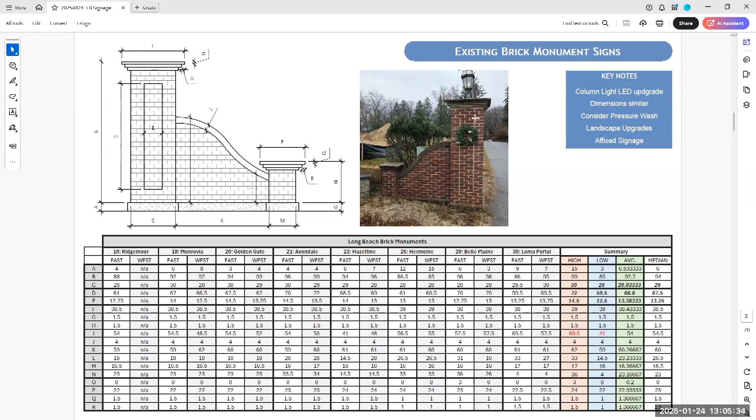The existing signs are in decent condition. They are historic too. So we're considering some landscape upgrades around the signs, maybe some signage affixed to say welcome to Long Beach. And then there are some existing lights on a lot of these columns too - maybe thinking going forward about switching out to some LED and a similar type of historic light fixture.

For an initial look, I looked at taking the columns that were the brick monuments - can we create these new places along Lakeshore Drive? As you enter into town, there are a couple different options. We kind of mimic the brick monuments. We're limited on the amount of space we have within the right of way here. We don't want to make anything too big, that's going to start hindering traffic and people getting by through here too.

So kind of looking at monuments, and maybe there's an idea of a sign affixed to the side of these as one early option. Potentially the sign could be built right onto the monuments, and this could be applied to the existing brick monuments too.

Since we have a little more room, these could become a little more grand for the main entrances into town along Lakeshore Drive, with some branding of the road name as well. Again, are we integrating lights from the existing monuments, a good way to highlight these opportunities. So for Lakeshore Drive we had a few different options, and these could be applied to either the west or east end of the project.

We also look at Chastleton coming into town in the south. This is a location where, based on the county's information, we have a much tighter right-of-way, only 40 feet here. You can see in this top left image the right-of-way might be shifted a little to the right, but the county's information isn't 100% accurate. This is the idea where we pick up the same column motif with some affixed signage, so there's consistency on both Lakeshore Drive and Chastleton as you're coming into the community.

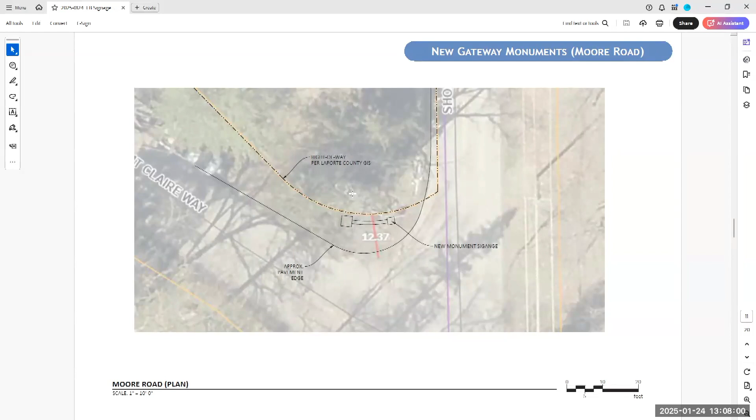The last location I looked at was Moore Road as you're coming in off Montclair. There's a bit of a sliver here where we have opportunity to maybe recreate the actual brick monument sign similar to the ones off Lakeshore Drive, or something similar. Or we could look at taking that same sign panel developed for the columns, but making it a little more grand as you pull in off Moore Road. So the idea is maybe one tall column with a light that steps down, similar to the Lakeshore Drive monuments.

Or we could do something a little more traditional, with two similar size columns on either side and a 'Welcome to Long Beach' sign in the middle. There are a lot of options for the actual signage, the wording, and the coloring, but we wanted to use this preliminary opportunity to see if we're in the right ballpark and gather some preliminary feedback on the overall design ideas.

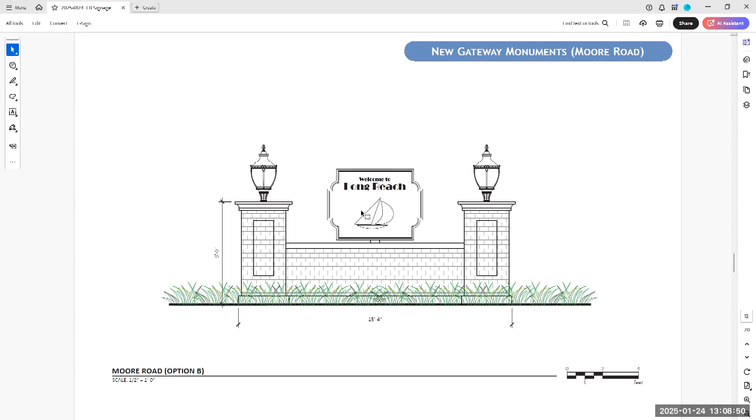The signs themselves can be made many different ways: HDPE, half metal, or printed vinyl too. There are standard shape options and custom shape options. We'll get into all those details as we further refine, and figure out what colors we want to go with.

With the town established in the 1920s, we started looking at some Art Deco appropriate fonts. These are just a handful I threw out as a starting point for initial feedback—the blockier types of lettering like Impetus or Broadway, or some more contemporary styles still paying homage to the past, like Mendel and Casablanca.

There are a lot of standard light fixtures out there that are LED compliant that we can match to upgrade the existing columns going forward. This is just a handful of them; there's more we can get into for picking out exacts and maybe considering replacements.

You didn't see this too much, but we also measured all the beach stop signs. They're fairly consistent with the exception of Stop 24, which is the anomaly of all of them. These are starting to show their age—the paint's chipping and they're starting to rust as well.

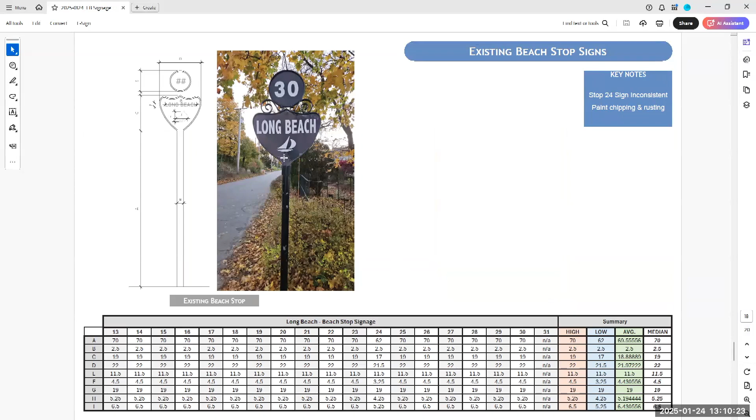So going forward, considering replacements of those, you'd utilize the same types used on the signage materials, standardizing the posts and any arm brackets, and the same with the street signs. They all get tied together in a family of signage—the beach stop signs, the street signs, everything can have a unique Long Beach touch to it.

So that was just kind of a quick overview of where we're at with the initial design process. I'll scroll back to some of these early concepts here and open it up to some dialogue and feedback from everybody. This is just our first ideas, but we really want to hear what everybody else is thinking, and work to help build a consensus here.

John, I just want to jump in here and thank you for the work that you've done here, taking this and expanding it into an overall branding of all the signs, and looking at this in the big picture, not just 5 entrance signs, but everything in totality. So I do appreciate that.

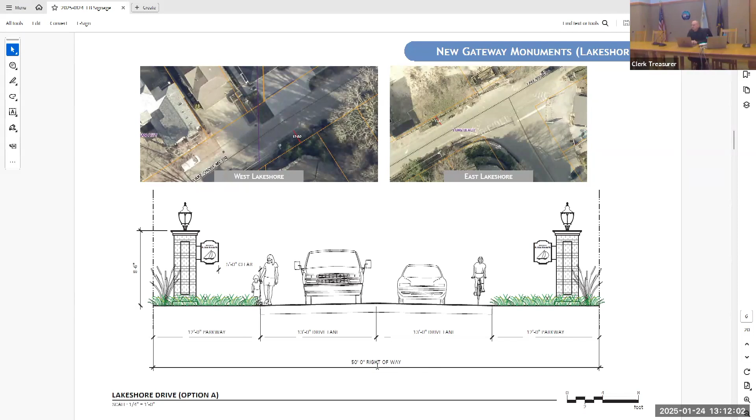I just want to confirm before we open it up to everyone's comments: is the underlying assumption here that we're working within existing right-of-ways, and therefore that's driving some footprints, especially on Chastleton, where we perhaps would like to see the flares on the side? But this is the room that we have and the setbacks, etc. So we're working with what we have. Is that correct?

That's my correct assumption. I'm trying to work within the existing right-of-ways of the town. Now, I will say on Chastleton, from my understanding, the town does own the parcels to the west here, so there may be some opportunities to bump this out, to redo the right potentially. But at this point in time, we're trying to fit into what's existing.

Great, thank you for that clarification. Open to comments. I know that we have at least 3 members of council on Zoom, but open to comments from everyone about the work that John has done.

I have a question, John. John James Brown, good to see you. Hi, Jan, how are you? Great. On the east side of Chastleton, is the property Michigan City or Long Beach? Do you know?

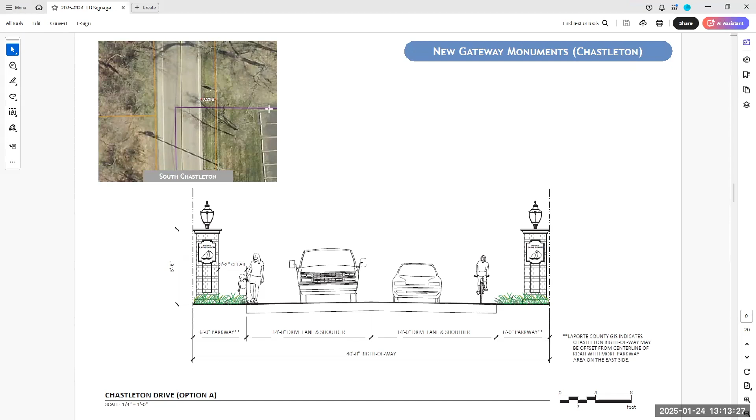On the east side, it's Long Beach. If you see this purple line right here, this is the Hacienda parking lot. Basically, the last stall in there is the line where the town's line to the north or south is here, so we're working in that zone. To the west, the town owns a little farther south too, on both sides.

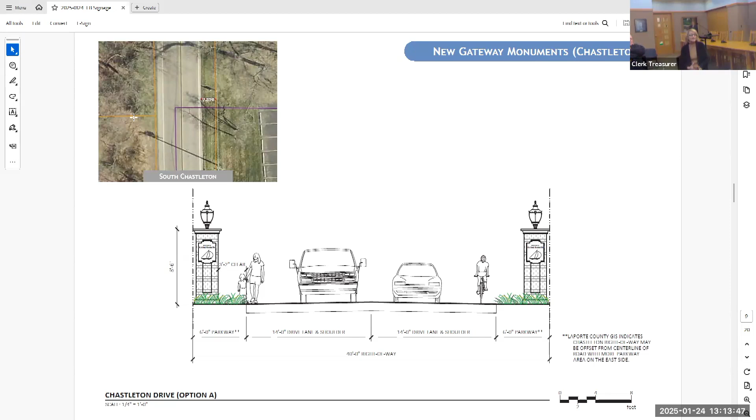Perfect, thank you. And then lighting—have you considered using dark sky lighting parameters for the lights? Yeah, I think that's a really great point, Jan. Where's my pictures of the different light fixtures? So a lot of these have the caps on top too that help prevent light from going straight up to the sky.

The current light that's out there has a bit of a glass top that does allow, I think, some light to filter through. So it's going to be a discussion of how to balance matching historic versus proceeding with a dark sky effort. I like to promote dark sky, especially on the lakefront there, to not contribute too much to light pollution, but I do recognize there's a historic aspect to the light that's on those columns currently.

Yeah, great, and that's a great point too, Janice. Over time on the existing lights that we do have, we would want to transition those over to something dark sky friendly, maybe when they need to be replaced. Perfect, yes, correct, just over time.

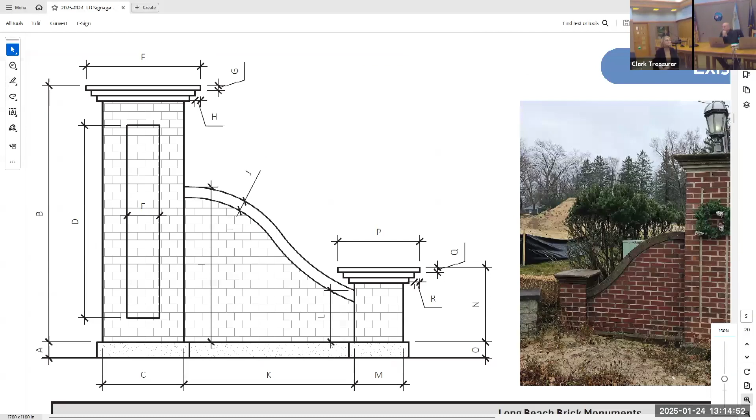That would be my next question, because doing it all at once—well, some of them are originals, I think, I'm not quite sure of that—but maybe there's another use for them so we can reuse instead of recycle. Whether 100 years old, we'll just go through it one at a time. Yeah, exactly. Other comments?

This is Kendra, I love it. I would just say at first glance, I love option 1 for Lakeshore Drive, as opposed to this one here. Yeah, I like the look of that, but I'm just wondering if we have enough room with that hanging, or if...

...with the sign kind of protruding out to the side, if there's enough room or somebody on a bike is going to run into it or whatever. But I love the look of that, just visually. And then I love the look of option B for Moore Road.

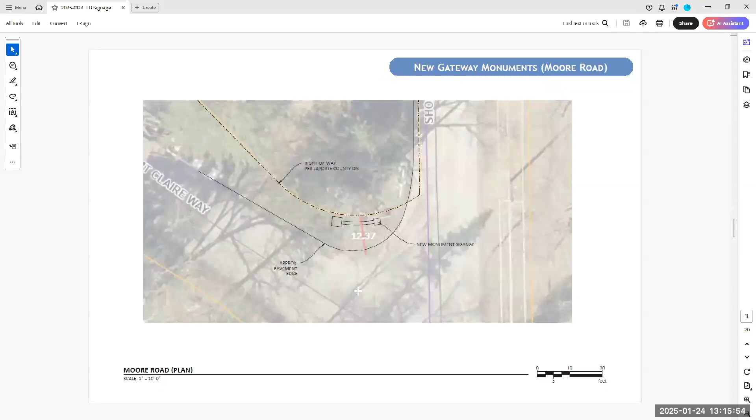Those are just my opinions. And then, which is this one? Yep, I like that one. And then I love the heritage version of the light on top, and I really appreciate it. I wasn't expecting your presentation to be consistent with making things cohesive within the town, which I really appreciate. I love all this, I hope we can incorporate all this. I like the look of that heritage lamp.

The only thing I maybe don't like, or don't think I will personally like, is putting signage on any existing pillars that are already there, like at 21 or wherever the pillars are that lead inward to the streets. I'd like to see the Long Beach or Welcome or whatever you decide at the entrances, but leave the pillars alone where they stand. Maybe just make them all consistent with the new light fixtures and new street signs. I wish we could get back the old street signs they took away in the early 90s. Those were the best, but this looks really great. Thank you for everything, I like it.

Well, thanks, I appreciate that. And I think that's a good point about the signs coming into the brick monuments too. I agree with you to some extent here, these were the historic ones, let's keep them as is and keep the signage to the entrances as well. It was just another opportunity to start tying everything together. I thought it was part of my job too, to take a step back and cohesively look at everything as we're getting into these discussions. I think it helps facilitate decisions we'll make down the road once we're looking at everything cohesively. Absolutely.

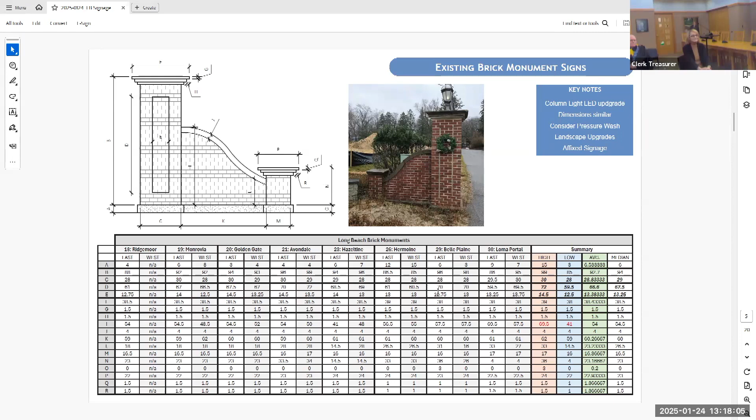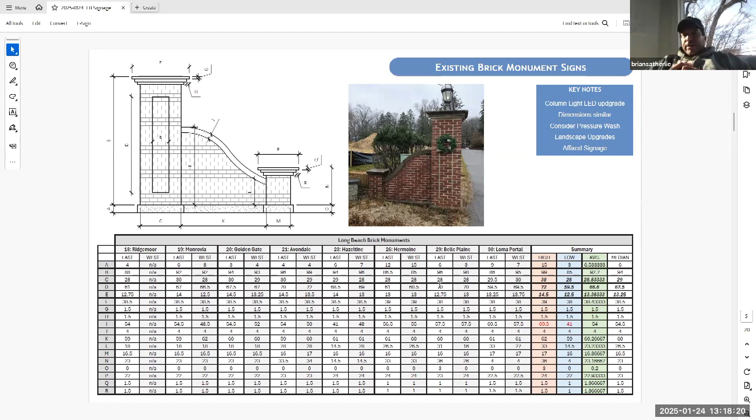Brian: I have a question about the stops, the individual beach stops, the signs you said are deteriorating. Is the goal to fix those or eliminate them? I think that's a question for the group here. To fix them, these are sheet metal pieces probably custom done 50 years ago. They could be taken off and restored, or do we want to try to match this with more modern type of materials? There's a couple different options we can go there, obviously.

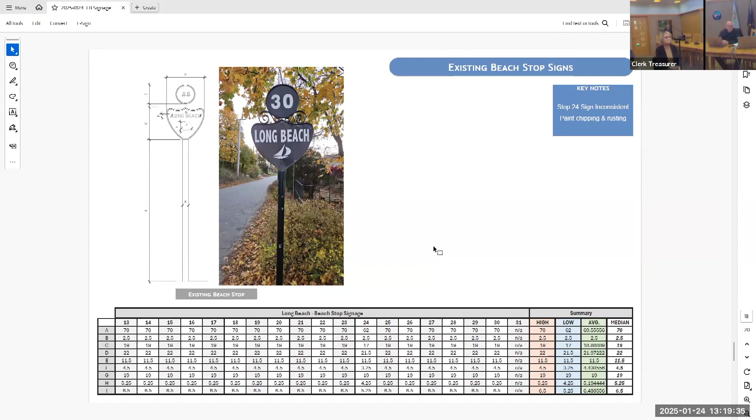But Brian, just my opinion, I think the objective would be to keep the stop signs but integrate them into a cohesive look with the other signs we talk about building, or add to the existing pillars to make sure we're using the same sailboat. That sailboat is sometimes different, but yet a cohesive brand across, but keeping those signs and stops I think would be my vote. But Ken just gave the thumbs up. Your thoughts on that, Brian? Are you in agreement with that?

I am. My other question would be, I don't know how to phrase this, but the stop signs, individual stop signs and speed limit signs, is there a goal to do something with those as well, or just have the standard stop signs and street signs? Are we going to try to have some cohesiveness through all of the signage, or are we going to leave some of the mandatory traffic signage alone?

The way I viewed it, Brian, was I think this is an opportunity here, an opportunity to tie things together. It's not a necessity, it's not a requirement. And I understand there's going to be financial impacts to changing all of your stop signs to a more aesthetic type of pole and everything. If this is something the town is considering, I can help you try to quantify these, try to understand replacement strategy or timing or what that cost might be down the road too. That would be my vote, to see if we can do everything to keep that cohesiveness.

And I think that will add to the branding of everything of the town. And Brian, just to be clear, in the current scope of work that the council has funded, this is outside of that, but John was nice enough to present the concept, that if we want to keep going in this direction with the signage for the stops, now is the time to contemplate all of these things, and as stuff needs to get replaced, perhaps do it this way, but that is outside of the scope of work that council did fund at this time. Okay, thank you.

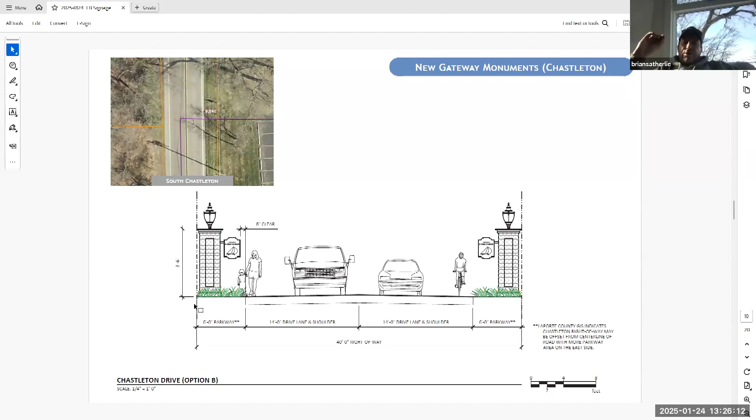What do those signs say? Do they say 'Welcome to Long Beach'? Right now I just had these say 'Welcome to Long Beach.' There's room to say if there's a town brand, a beach community, or any other information here, but I just kept them simple at the initial stage.

And what would the back say? You're leaving Long Beach, goodbye. I could, yeah, some communities do say goodbye, thanks for coming. Some just leave them blank too.

I would add, I agree with Kendra regarding the uniformity aspect of things. If you're going to go with the singular pillar, I kind of like the use of that pillar at all the entrance stops, with maybe the one that Janice was talking about. I'm not familiar with it. Oh, that pillar would be fine. So I think uniformity would be what I'd be concerned about.

And I really like the look of the pillar with the signage being off of the pillar. When you put the sign on the pillar, it takes away from the pillar, in my opinion.

You don't see the full detail of the pillar, but if that's the only option because of the limitations, then I guess so be it.

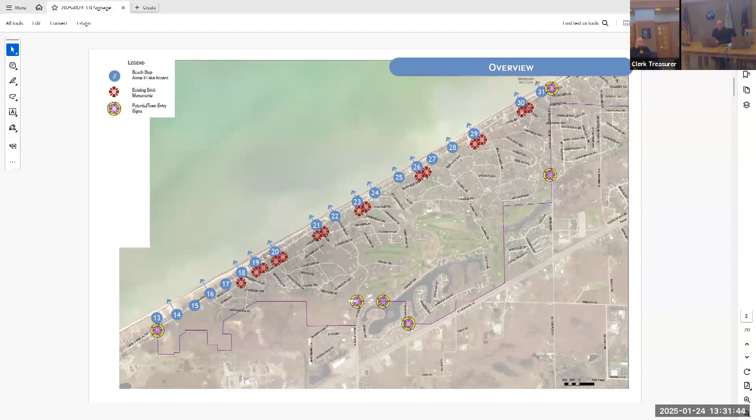Yeah, and okay, then cool. Also in consultation with the chief of police, I think that's about where, from a safety perspective, we still ensure that we're not creating unsafe conditions.

Absolutely, and even from snow plowing aspects, and just from general maintenance too. These were preliminary concepts, but make sure everybody in the town is comfortable with the setbacks we're having, and that's one thing I did try to indicate with kind of clear zones from the edge of pavement, just for everybody's quick reference. This might distribute into other departments.

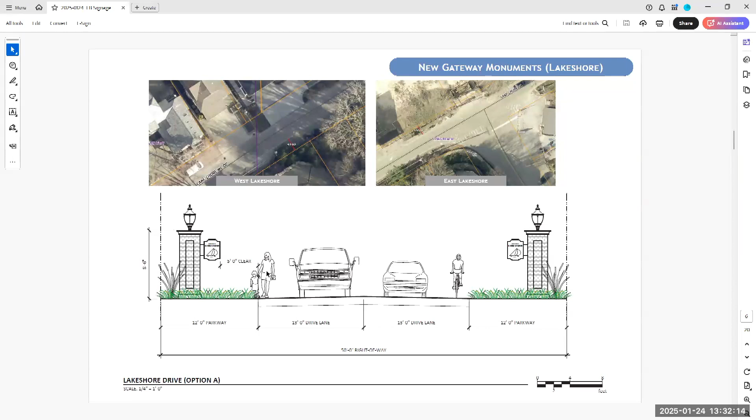My only other question, probably better directed to JD, is there a timetable, or where do you go from this stage? So the council approved this, the scope of work approved by the council is 2 steps. This is step 1, and the next step is taking feedback here and then working to modify, taking back into our feedback. That would be the scope, the general initial scope of work, and that's been funded at this point.

After that, I think we would then rely on John for what the next step is to take it from where we're at, and the costs associated with it, so council would have something to actually look at and understand and wrap the money side of it. So that's the steps as I see it.

Can anybody else, Anita, I know you're on here as well, and then Cindy and Kendra, do you see this going past the initial stages? Is that how you would like to see this evolve? Yeah, I think that's what we need to do, get some costs, firm it up a bit, get some costs associated with it and see next steps, what we can do.

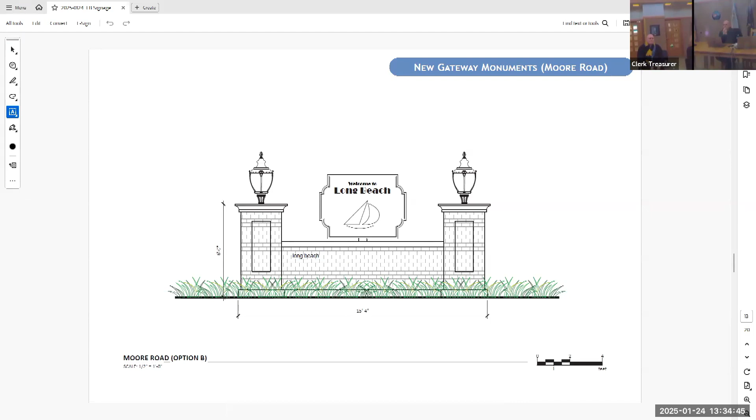John, another question, going back to Chastleton at Hacienda. So it's 6 feet from the roadway? Wow, that is tight. Very tight, yeah. One of my concerns, well it could be a good thing or a concern.

The Marquette Greenway is going in. It'll be put in probably from Michigan City, near Liberty, and it's going to go on the north side of the Amtrak, and it will go through by Carwick at the Alps. So there's going to be the trail there. People might be riding their bikes a lot more often, getting off the Marquette Trail and coming to stop 24.

If people are riding their bikes, I mean, Ellen and I take care of a little sign there, we put decorations on it, the current one. Even with a little bit of snow that we have, there's snow that piles up really close to that sign now, and I think it's probably infringing on the property line outside of the parkway there. And that low sign hanging off, while I love it, we might need to consider headroom.

Or the other side, good idea, because I walk that road and you have to ditch off into the grass quite a bit because of the traffic. I think that's also a good point, that if we have space to work within, we should push it as wide as possible, if we put signage on the outside, so the road can be expanded for the bike path later.

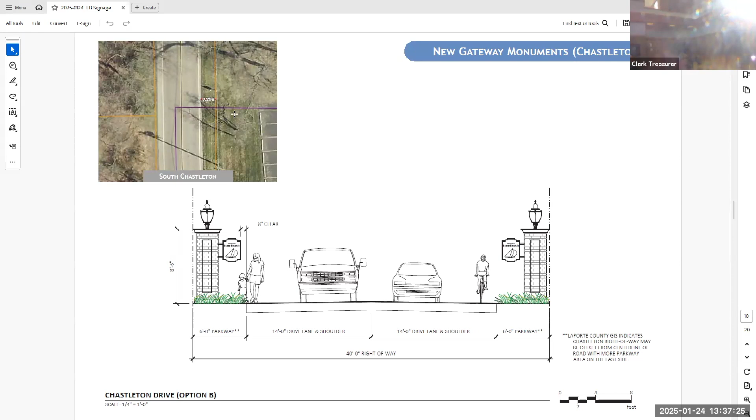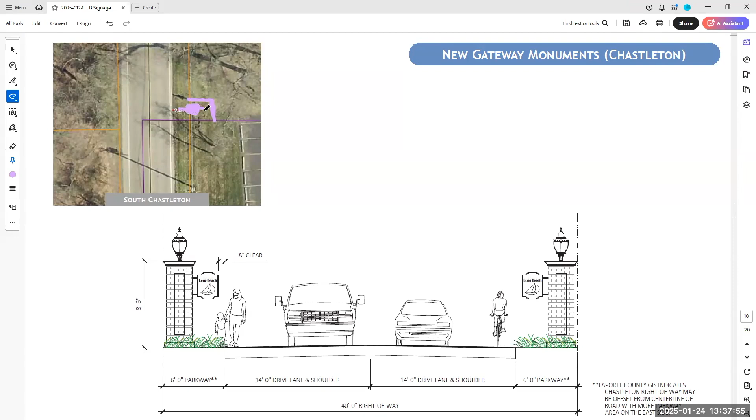Right, Jan, I think that's a great point here. That would take a little more effort, but I have seen before us getting maybe a signage easement or something, where we've got a little bit more room to place something off the road, and you're just kind of carving out a little bit of that property that's not really being utilized anyways. But that's a little more of a process to go down. I do agree with Chastleton on this.

If we're going to go with the signs mounted on the side, this really needs to be looked at by emergency services, snowplow, everything too. Is that really going to be restricting Chastleton more than we want it to? Yeah, because I love that hanging off of that edge too.

I love it all, John, thanks. Oh, thank you, I appreciate that. It's beautiful.

So next steps as a part of this scope of work, just to clarify, this group's direction is to go with these pillars with the signage off the pillar. Is that correct? Is that where everybody wants, the direction we want to get, John?

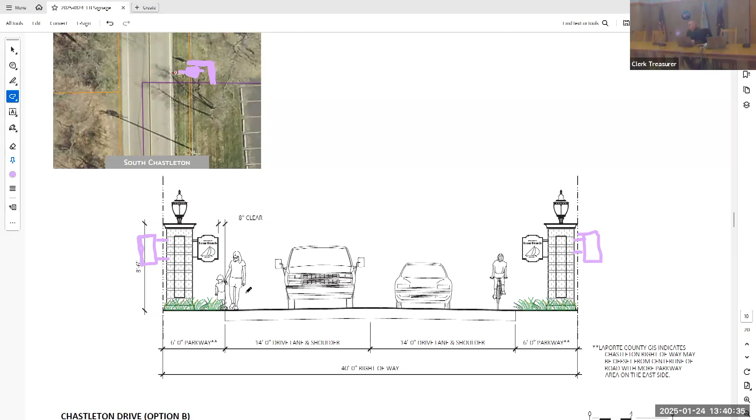Would the group like to see that, what that would look like? Because the same concerns exist on Lakeshore Drive. Could we, if we did the signage on the other side, put a little wall underneath it like you have on one of the examples of Moore Road?

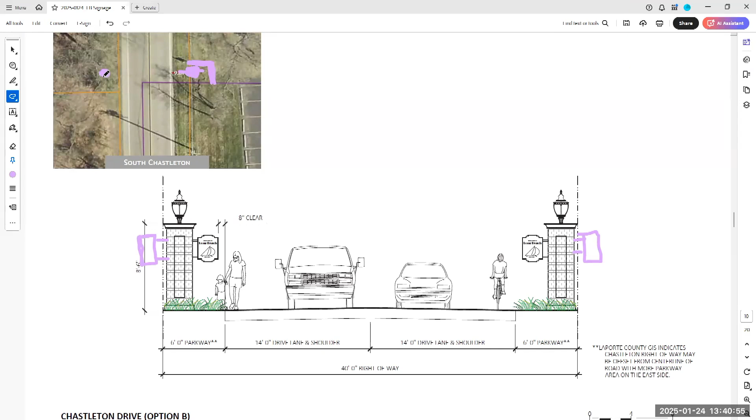I think, you say if we went to this side of the street? We just talked about Moore Road, if you would. Can you go to the Moore Road slide? One more back, I think. You had another example from Moore Road. Oh yeah, yeah.

This would be an opportunity, as Jan got into, if we could get an easement to get a little bit more space here. This could come off of this side, and then we could have our sign in here. I'm just getting restricted by where the right of way line is right now, but if you had more room, then most certainly.

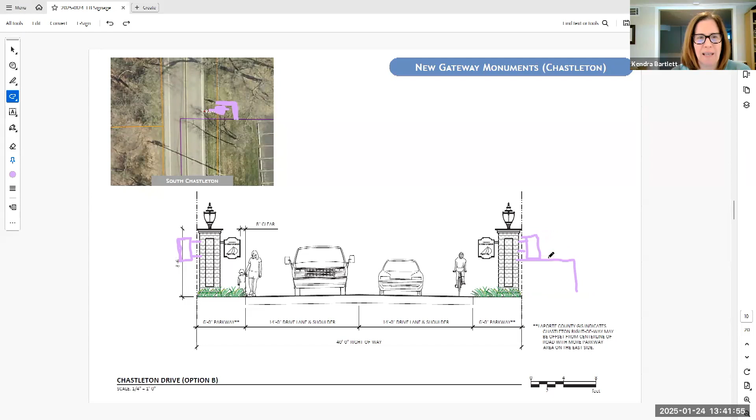I think, I'm obviously no engineer, but that just looks like more money to me. More busy, more money, not as uniform. If we can work it out as your option B or option A with the easement and stuff, that would be my preference rather than trying to — because I think the sign hanging off the other side looks a little awkward, and the trees would probably get in the way and maybe you wouldn't be able to see it. I guess I can't visualize it, but I would say, I'm sorry, go ahead.

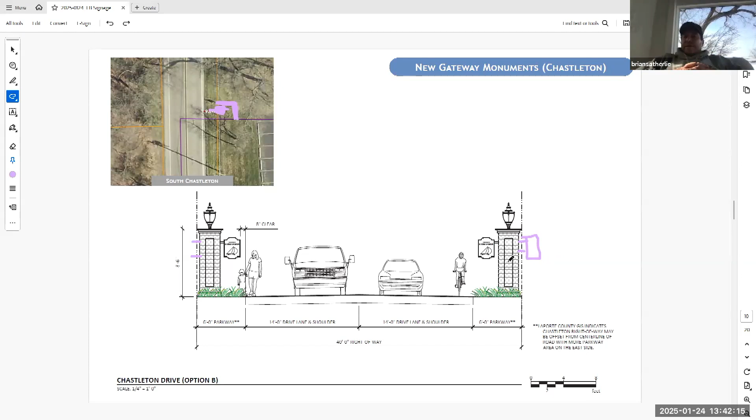I would say, to your point, the signs on the other side look awkward. If the signs can't hang off on the side, I'd almost rather see them on the pillar. Yeah, I'm with you, I agree with that too. I agree with that, that's it. Okay, it's great, go for the easement.

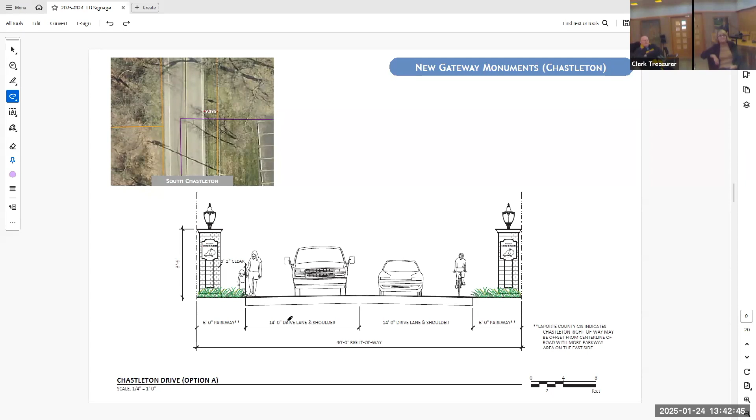I mean, it shouldn't be that difficult. I would say if you could go for an easement with the sign hanging off, with the sign on the pillar being the secondary choice. I think it looks a little awkward coming off the other side. So just push for that.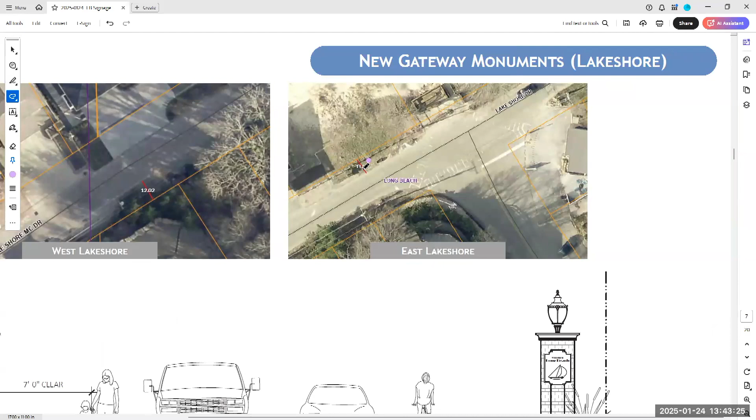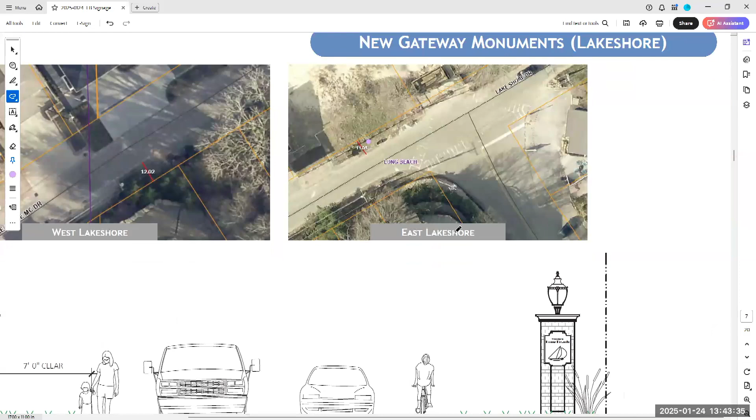But I guess then, can we look at the Lakeshore Drive entrances and see how much space we have, especially on the East Lakeshore Drive? Do we have the space there, if it's also on the offset option, to not impact any bicyclists or create a safety issue? I believe so — on the east end of Lakeshore Drive, I measured about 11 feet from the pavement edge to the right of way. This isn't 100% accurate, but probably within a foot or two of that, so we have a little more room here than we do on Chastleton.

Can you go back? From what I can get — can you go back one slide or forward one slide? Because there was another option. Oh sure, that one — could that go onto Chastleton?

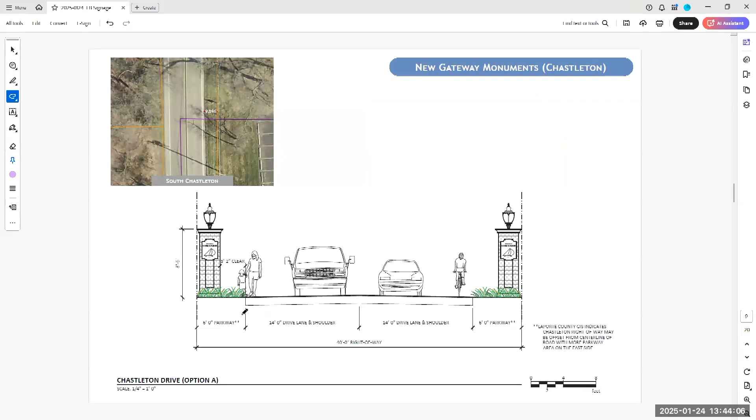If we had more room, still - it's just very narrow here. It almost started eating into the roadway, and I don't want to put a wall right up against the edge of the road there. It'll get clipped, or hit by snowplows. I think you'd always try to get at least 5 to 6 feet clear of the edge of a road, ideally.

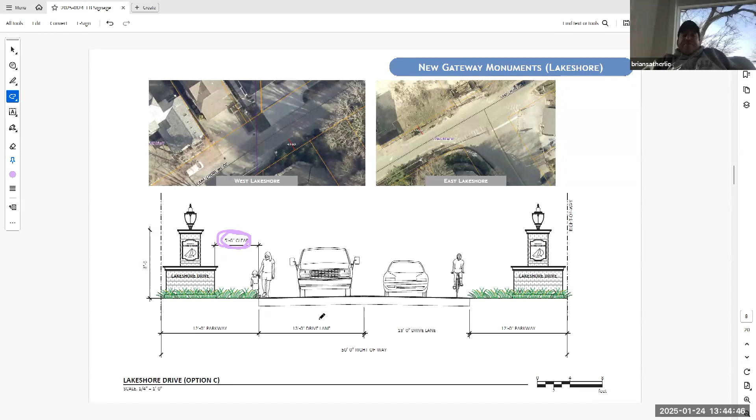My opinion is, I'm not really a big fan of that one on the screen right now, because it takes away from the historic aspect of the singular pillar going all the way down that you showed on the previous screens. I agree with that - that would be my preference. Yeah, I agree with that, Pat.

So the direction for John is to continue to focus in on the offset signs that are on the interior to the road.

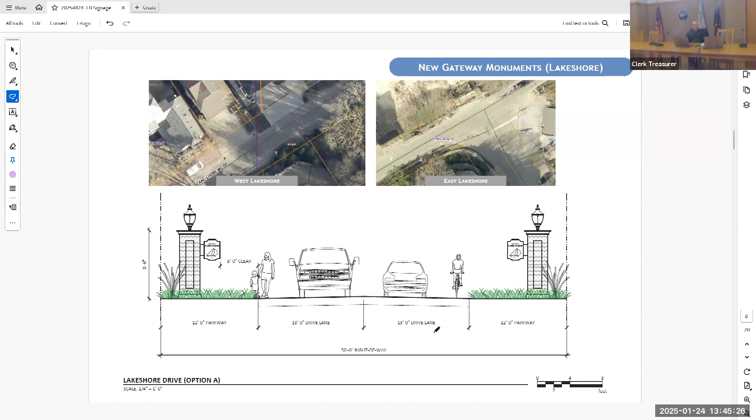I think for the next steps, it sounds like one of the things you guys need to know is what these things are going to cost too. Once we get into whether the sign is rectangular or oval, that's probably not going to weigh too big on the overall cost. So my next step is to try to put some rough construction cost numbers to what I think these might be. We could take these drawings and review them with police and other departments just to make sure we're going down the right path, that it's going to be approved and reviewed fairly by everybody as well.

Then as that process is going out, you could be looking at easements for Chastleton, understand that, and some of the details of the fonts and all that can come pretty close to later on in the project, in my opinion. Is there any feedback that this group of citizens wants to give John about the offset sign itself?

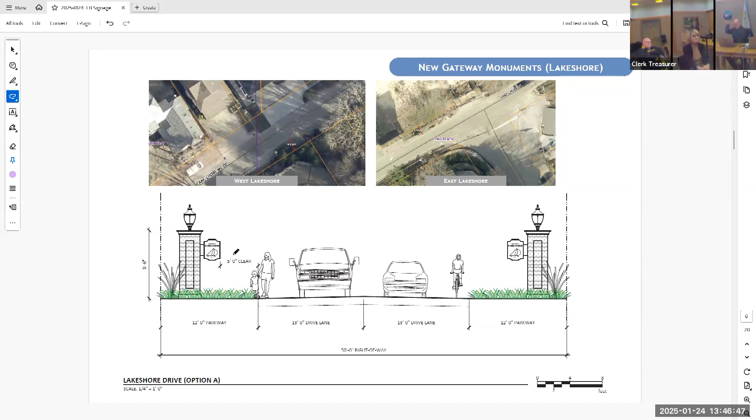Round, circle, square, rectangle - is it the current one? Do we want to send a variance on that? I like what you had, this one. I picked the one of the standard signs that I felt was maybe most Art Deco-ish of any of them, kind of had the strong geometric shapes to it. However, I could see the shield would be a little tough.

But we could do something more in the shield style as well, or the circle. So there's other different shapes out there we could play with, or pick up off of. John, would it be possible for the next round to play with a few options - the one that you have, the shield - just kind of play with those, so the committee, the community can see a few options from your point of view to stay within Art Deco, but look at that a little bit.

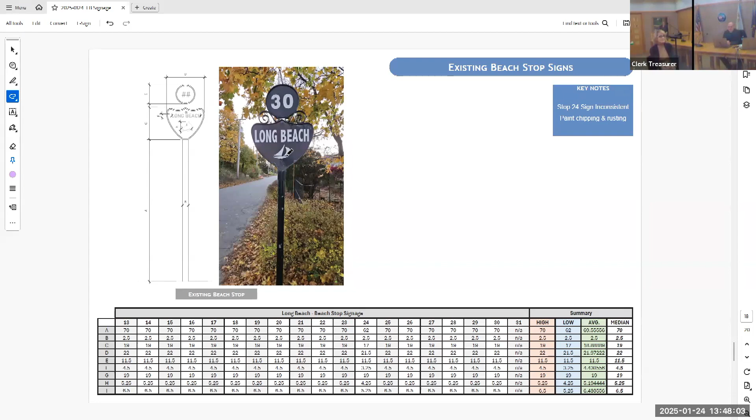Yeah, I'd be happy to do one of these as a shield option, another one as maybe just a circle, and if anybody else has any other shape preferences or something they would like, please feel free to share. I can run a few different examples.

I think that the one that ties to the existing style would be interesting to see. It would be interesting, just from a general scale, how big would it be? How big does it have to be just to put those words on with the sailboat? I'd like to see the scale of that. Because the scale that you have is nice - it's great, I like the scale.

And then anything from this group on fonts - what does this look like for on that? I can even just keep different fonts going. Maybe my question here might be, do we want to say anything more than this on the sign? I think it's just Long Beach and a sailboat - it doesn't even say welcome to.

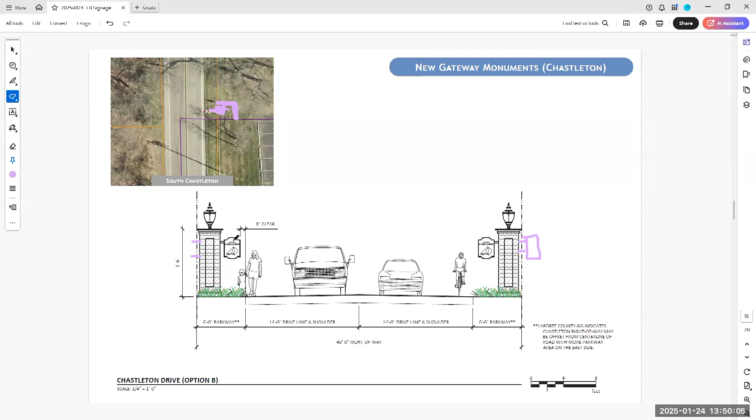I didn't put a dimension on it offhand, but I want to say I made these about 3x4 or something. They're fairly good size. The sign too, and then I can work with the heights of the letters. It's potential for the things.

Since this one is shorter, maybe I want to make them longer and stack. Long Beach too. I might want to play a little bit with the fonts and the layouts and readability sizes. Cool. And then, John, the other thing is, in the next round, if you could provide a little bit more detail, as we were just talking about, what is the size of the sign, the offset, a little bit more measuring.

Oh, sure. Even the light on top, because even what we're looking at seems like a light is awfully - is that to scale, or if we scale it's not gonna get smaller?

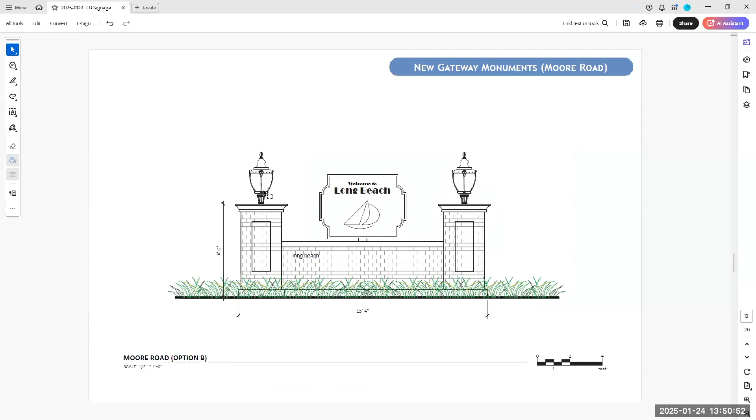Yeah, so for the lights here, I think I used this town square as what I dropped into the models too. So the scale will be rough, but it's all going to depend on which light you might end up choosing at the end of the day. And like I said, this was just a quick 5 that I picked, and I know the supplier has another 30 to 40 more different options out there too.

Just give us what is the optimum height that we'd be looking for, so that when we take it to the council on next steps, it could be a variety of points, but not more than certain, just in general. Yeah, no, absolutely. I'd be happy to provide a little bit more detail and dimensions for the next round.

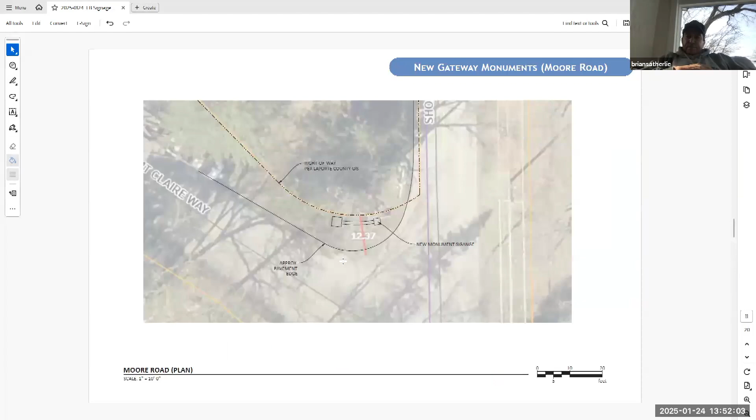Is there any other comments for this group, for John? And again, John, thank you and well done. Only one question I had - do you know of the original font when the town was established, by any chance? It wasn't anything I could find, Brian.

I found very little branding information or anything here that I could match. That could be something kind of cool if we could bring back the original font or a version of it. If somebody even has just a picture of that, send that to me - I might be able to do some homework and backtrack what type of font it was. Really all I've seen is just this kind of almost Arial generic font on the town seals and logos.

Would that, Brian, be over in the community center with the rest of it, the photos and over there? I maybe think it might, but I do know I've seen - I don't know where it currently is - but there is some initial promotional materials that were distributed, brochures urging people to buy property in Long Beach.

And I know I've seen that - I think Doug Waters, the realtor at Long Beach Realty, was the one who had that. Whether that's been given over to the Historical Society, I'm not sure, but that would be a place to look. I'd be happy to reach out to Doug Waters if they're interested.